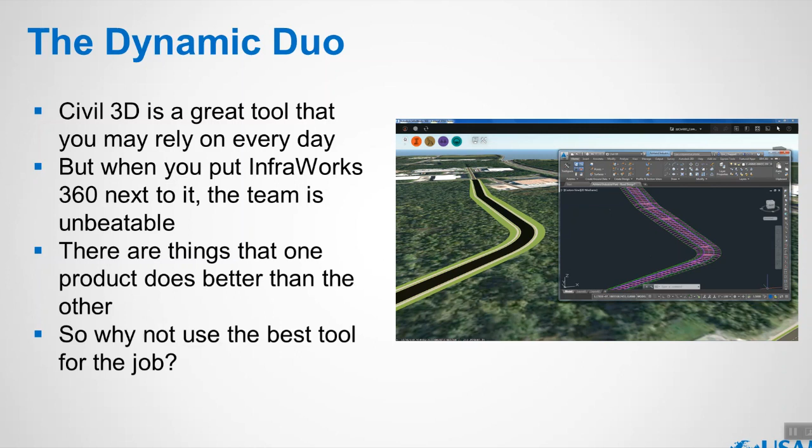Now, a question to people who are using Civil 3D over there: what and all can Civil 3D do? As it is not a live interactive session, I will just say my answer. So what and all can a Civil 3D do?

So in Civil 3D, we can input our survey data, which we found out, which we got from our surveyor, or which we took from the internet, or from our previous projects or something like that. We can make an input of it, we can do the road designs of it, and we can do the storm designs also. Then at last we can do detailed design and documentation of it. So these things and all are possible in Civil 3D.

So what are all the things? I'll repeat it. We can make use of the survey inputs and put them into Civil 3D, and the inputs will be grown as a surface over there. Then in the surface we can do a preliminary road design, we can do a stormwater design, and then at last we can do the documentation of it also.

Now let's see how these things work together with our newborn baby Infraworks. Let's take a look at how both the duo works good. Now we have a situation here. So I'm going to explain how these two tools are going to be a race winner here.

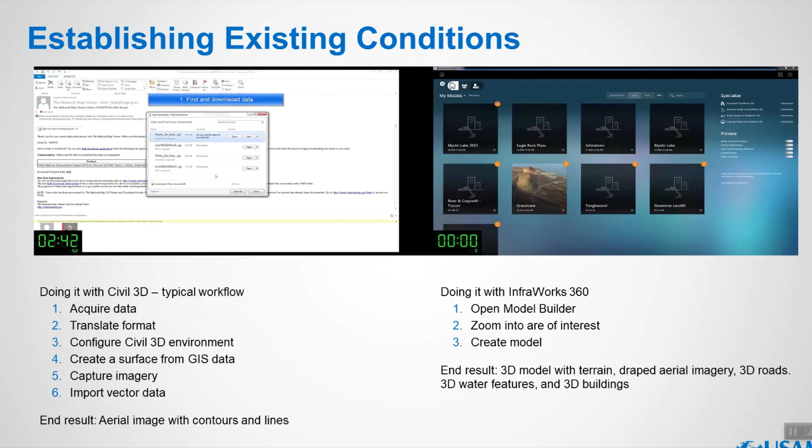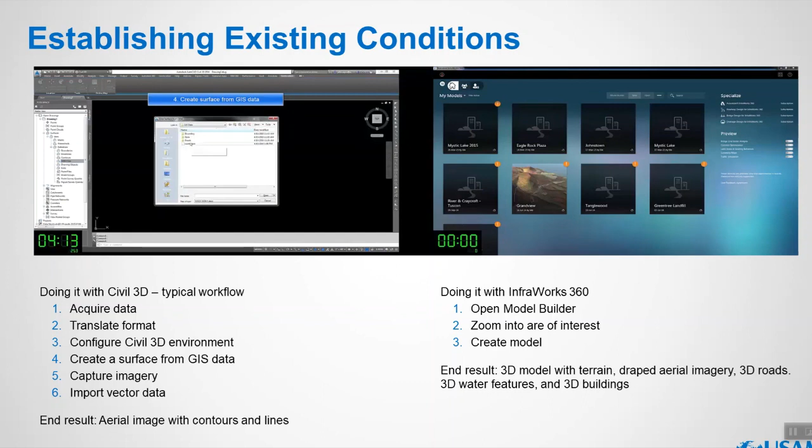Now we see them bringing survey data from an internet source and finding the place where they're going to make the project. They find the place and give the inputs to Civil 3D this way. Normally we don't rely on these steps - whether in tender stage or execution stage, we get inputs from our surveyor and feed it to Civil 3D. But here I've shown taking inputs from an internet source. Now the points have been brought into Civil 3D, and GIS data has been brought into Civil 3D.

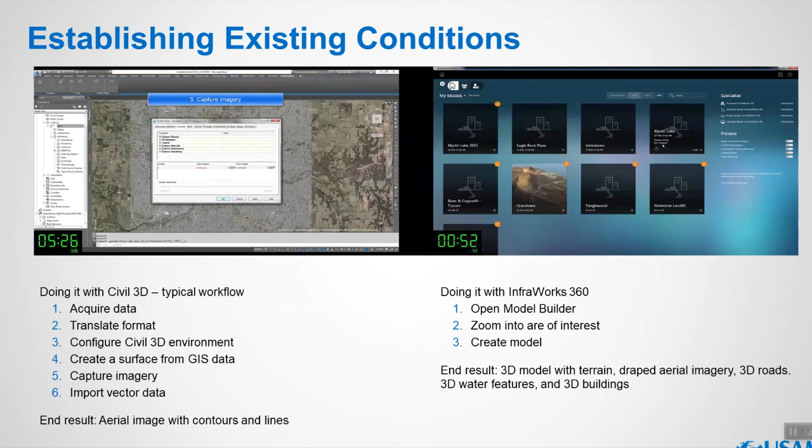Simultaneously on the right hand side, I'm opening my Infraworks, opening the model builder, and inputting the place name. Here comes my place name in the model builder. I'm just opening the project. Now the project will appear in Infraworks. You'll get the mail once the project is ready.

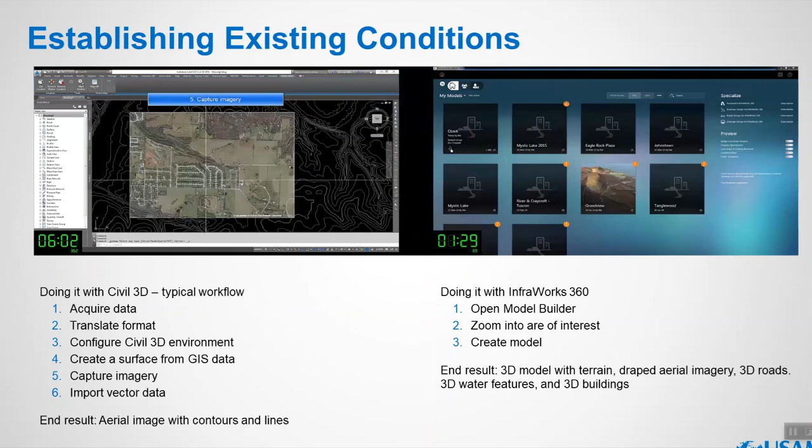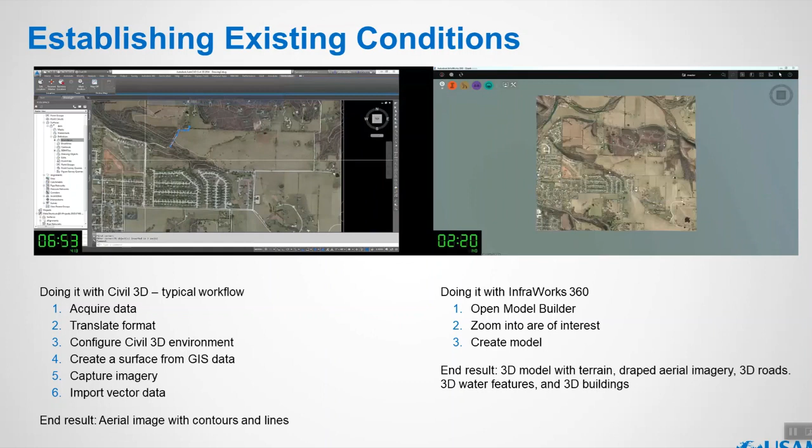On the left hand side our Civil 3D is running, we are making the map over there too. On the right hand side, the Infraworks video is running. Here we've got the model in just a few minutes - the same model we made relying on Civil 3D, we've got in Infraworks much quicker. The comparison is about 7 minutes in Civil 3D versus 3 minutes in Infraworks. You can see the real difference here.

What we did in Civil 3D: we brought the survey input, our GIS data, from some other internet source, made it an input in Civil 3D, cropped the area, and gave my latitude and longitude to crop the area. But in Civil 3D, what appears is just an aerial image, that's my map - an aerial image with only the contours of it. Note this point: aerial image alone, with only the contours.

But in Infraworks, within the quick time of 3 minutes, I just inputted my area name, that is my latitude and longitude, and the whole aerial image was there. I just cropped where my project comes, just cropped the place. So a full 3D perspective view of that area is in my Infraworks now.

Just 3 steps - here there are more steps in Civil 3D, but here just 3 steps. You should know this point: what is my end result here is a 3D model with terrain - we got our 3D model with the terrains, that is, ups and downs in the surfaces. Then 3D roads, whatever is available over there. If there is a building, it would be available in 3D. If there is a bridge or rail over there, all the things will be in 3D.

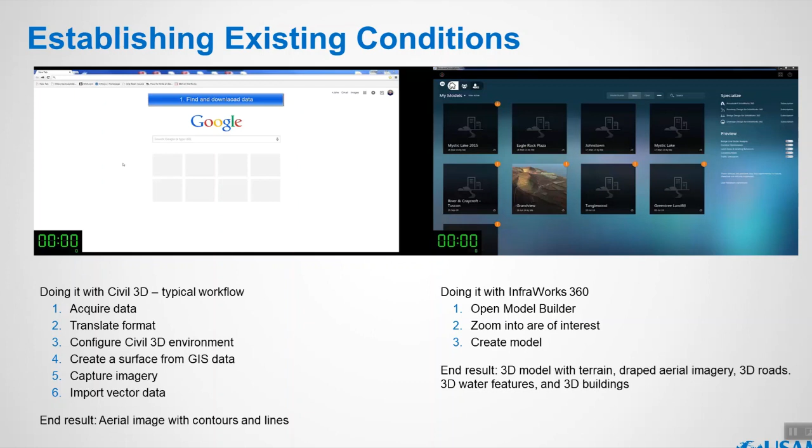But both put together, how you can work smartly, that is my point. Now what we saw, we are going to see the comparison - the ins and outs in it.

With Civil 3D alone, I have made it in 7 minutes. With Infraworks, I have made it in 2 minutes 20 seconds. Now what are all the pain points over there?

We are going to talk about the pain points. With Civil 3D alone, we don't have our survey inputs. So we spent much more time locating the data, and in deciding from what source we should take the data, we spent more time on it.

That's the first point. The second point is, basically to work on Civil 3D or any design tool, expertise level is a must, and experience to get this data. So where to get this data and where to pull out the things, experience is required over there.

Then there are many steps involved in this to bring it together. If I teach these things now to you in a span of 10 minutes, seriously, no one will be gathering and repeating the same thing in your system, because it contains more steps. You will be getting confused in it. So we should look over it and do the things carefully - the experience plays here.

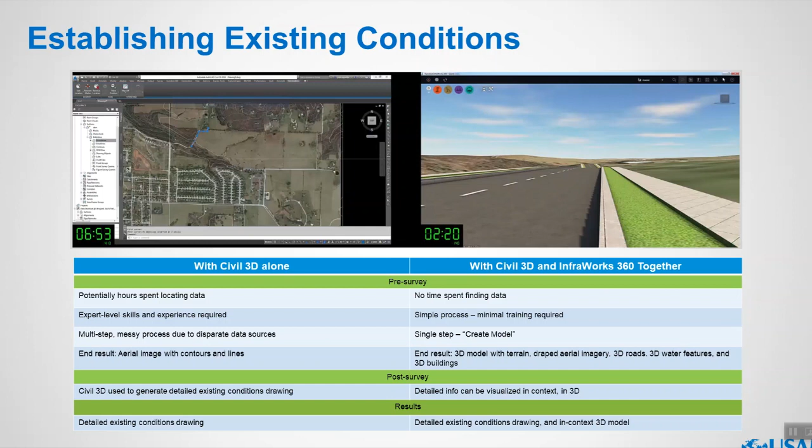So the next thing is, we saw about the survey part, right? As I said earlier, Civil3D does the survey work, the road work, and the rail work. Now we are here for preliminary road designs. As we all know, Civil3D is a design tool where you can do designs as per the codes. From 2019, they have brought IRC codes into it. Before that, they had AASHTO codes. But from 2019, we have IRC codes inbuilt, so we can make use of it and do the road designs in it.

Now we are going to see how road design works in Civil3D and how it works in Infraworks. The same concept which we saw before in the survey, now we are going to see in road design.

Now our situation is to develop a preliminary road. We have brought our survey records, right? So in that survey place, we are going to do the roads. So how much time it takes to complete in Civil3D and how much time it takes to complete in Infraworks.

The road should contain engineering based horizontal and vertical design, because every road should contain horizontal and vertical elements. That is, our super elevations will be there, then the alignment curves will be there, right? So that and all we will be doing according to our codes. Then the cut and fill of the roads, then at last, as I said earlier, how long it will take to complete the things.

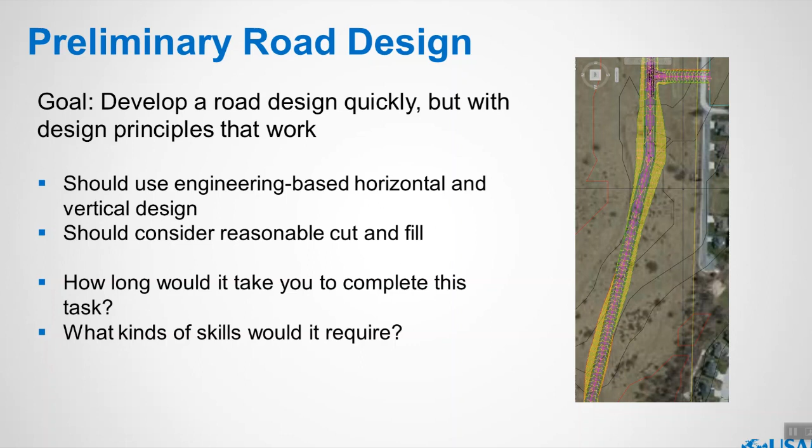Now we are going to see the comparison between these two. What I'm doing is I have recorded the things which we have done in Civil3D. You can see the left hand side video running. What we are doing is we are acquiring the place where the road comes, and we are just drawing the alignment in it. How the road comes, we are drawing the alignment and making the profile of it.

Every design engineer would have come across these terms in their projects, but other than that, many people are here, right? So alignments are nothing but our center line of the roads or center line of the rails. Then the profile is the section of that alignment which runs on the surface.

That is, our ground surface is there, and there we are running a line. How that line, based on the surface, in horizontal and vertical manner, how the line runs on the surface - that is termed as profile. That is vertical sections, so that is called profile.

So we have made our alignment in the project where the road runs. Then we have taken the profile for that alignment. We are seeing the profile for that alignment. Automatically the profile is nothing but how the alignment runs on the surface in a vertical manner - what ups and downs are there in the surface.

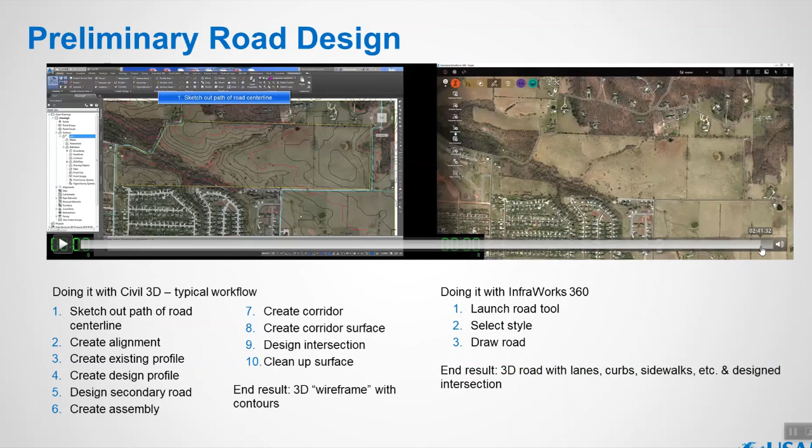We have made the roads. I have just drawn a line horizontally, and I have drawn a line vertically, and there comes my roads on it. I'll show you again. Can you see? So what we did, we just opened the project, we just drew a line, and in a matter of seconds my road has been drawn over there in InfraWorks.

But in Civil 3D, obviously Civil 3D is a design tool, so we'll be having all the design perspectives in Civil 3D, so it will take some time to create the roads in Civil 3D. But here in InfraWorks, in a matter of seconds we can complete the things.

But as we said earlier, InfraWorks is a pre-engineering tool. You should make a note of it. Only 75% accuracy will be there in InfraWorks.

Now I'll repeat the steps which we did in Civil 3D and InfraWorks. So what we did in Civil 3D: we have survey records, we have drawn an alignment over there, and we have made an existing profile, that is horizontal, that is vertical profile of it. Then the design profile of it, we have made the design profile. Then we have made the assemblies, how the road should be.

We have made the cross sections of the road, then run the corridors on it, and created intersections of it. The result is just a wireframe on the ground which we have created, and you can see it on your screen.

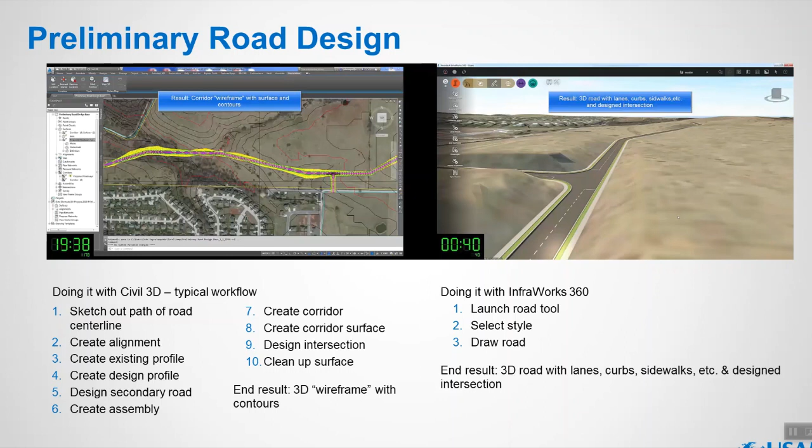So basically, we have done our road design in Civil 3D and we have made the roads in Infraworks also, right? At one point, after Infraworks, as I said earlier, you can do the preliminary things in Infraworks, and you can bring it directly to Civil 3D without any losses.

Civil 3D and Infraworks is a duo tool, so you will be having the Infraworks icon in your Civil 3D, and you will be having the Civil 3D icon in your Infraworks tool. So in both of the tools, the icons will be there. So it is a duo relationship tool.

So you can directly bring the things between these two softwares, and if you change anywhere in these two softwares, the changes will reflect. So in Infraworks, if you change, the changes will be reflected in Civil 3D. If you change in Civil 3D, the changes will be reflected in Infraworks. This is the duo relationship of these two softwares.

So once the preliminary design is completed in Infraworks, we'll be bringing the things to Civil 3D. Here, our hero Civil 3D will play a major role, because to do the documentation purposes and the detailed design purposes, we should rely on Civil 3D, because that is a design tool and an engineering tool to make the outputs pakka (final).

Infraworks is just a prelim tool which gives you the output in a matter of seconds or minutes. But for the design and documentation purposes, you should rely on Civil 3D only. So I have named Civil 3D as the hero here. So you should know the difference now. Civil 3D is the hero, Infraworks is the new baby. So if both of them combine, you can get the better output and best output in a short span of time.

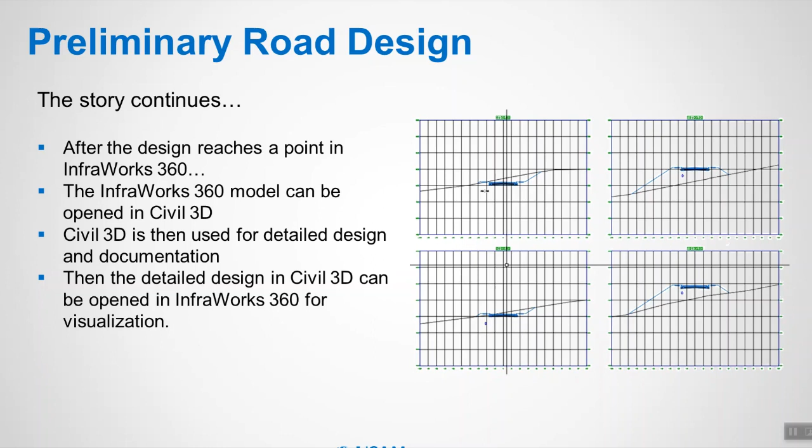Okay, so the same thing which we saw in the survey part, we are going to see the differences we have made in Infraworks and Civil 3D now.

So you can see, in Civil 3D it took 20 minutes to make a corridor with the intersection. Corridor is nothing but your roads. With an intersection, it took 20 minutes to do things with a high level of expertise. You should be an expert person in the design tools to make this 20 minutes happen, or otherwise it will prolong to an hour, 2 hours, or 3 hours. So high expertise should be there to make it possible in Civil 3D.

But here in Infraworks, it's just a 3-step process. Anyone can handle a new baby, but here this new baby, anyone can handle.

Now as we saw, there's a major difference here. In Civil 3D we have a 10-step process to do alignments, profiles, and so on. We have 10 steps to create that in Civil 3D, but here in Infraworks it's just 3 steps to make things happen.

Expertise level-wise, Civil 3D requires highly expert knowledge while only a basic minimum expertise is required in Infraworks. Civil 3D demands more detail than necessary for preliminary design. Even for a preliminary design, I'd need to give more details to Civil 3D to make it happen, but for preliminary design we don't need such accurate things. We just need an output for tender purposes, so we don't want to give more inputs and waste our time. That's why Autodesk recommends using Infraworks efficiently to get your prelim work done in a short span of time.

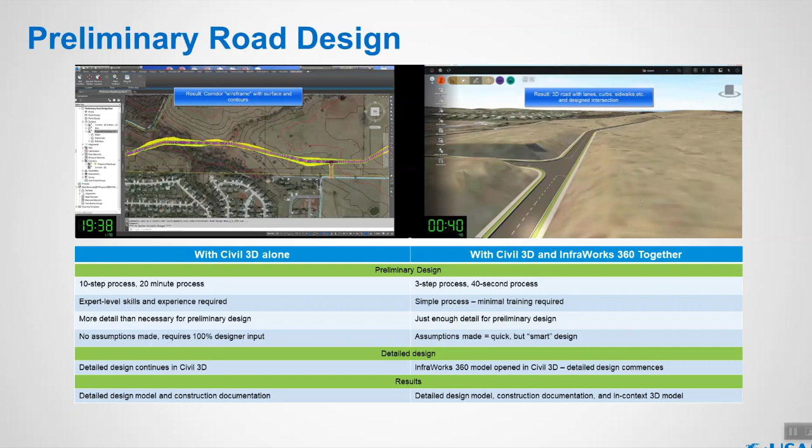Now we saw the basic preliminary road design right there. Now we are going to see how I'm talking about Infraworks being a great tool or Civil 3D being a great tool. It's not like that — you should keep in mind that both software have their own capabilities. As I said earlier, if you work together with these softwares, you can make your work best and complete it in a short span of time.

Now we can see how our hero Civil 3D does the detailed design part. We've just seen the basic prelim road design; here is the detailed design. Detailed design means labeling, section work, how to take the sections, how it will generate sections. Many people will have a doubt whether it will take a section or not.

The main thing we can do in Civil 3D, as I mentioned earlier, is storm design and sanitary designs — sorry, not design, it's modeling. We can do storm pipe modeling and sewer pipe modeling here in Civil 3D. In infra projects, pipes are a must, so we look at how the drainage system goes through the infra lines.

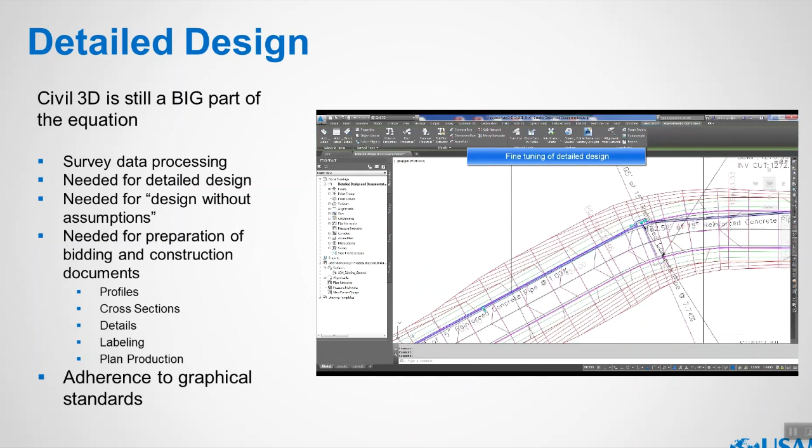So we are going to see a short video of how the detailed design works in Civil 3D. You can see the corridor which we made over there. They are just fine tuning the detailed design part, and you can see they are labeling the things here in Civil 3D. This is how Civil 3D is a hero here.

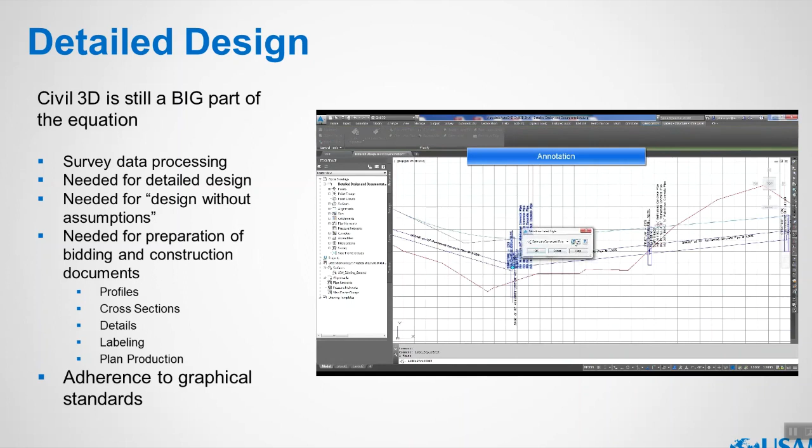Civil 3D can do all the things a design software can do. Labeling is an important part and documentation is an important part of the output — these two are the important parts. You can see how it works faster, how it connects to all the views, and how section views are generated automatically with just clicks.

We can alter all the things here in Civil 3D, just like in AutoCAD. Now we have brought the sections here and our documentation part is ready in Civil 3D. On the left hand side, you can see Civil 3D is still a big part of the equation — as I said, it is a hero. Survey data processing lets you process, filter, and prepare the survey data to make the surface from it.

We can do all the things needed for preparation of bidding in it. You can do the labeling parts, the documentation parts here in Civil 3D, according to the graphical standards and also the code standards.

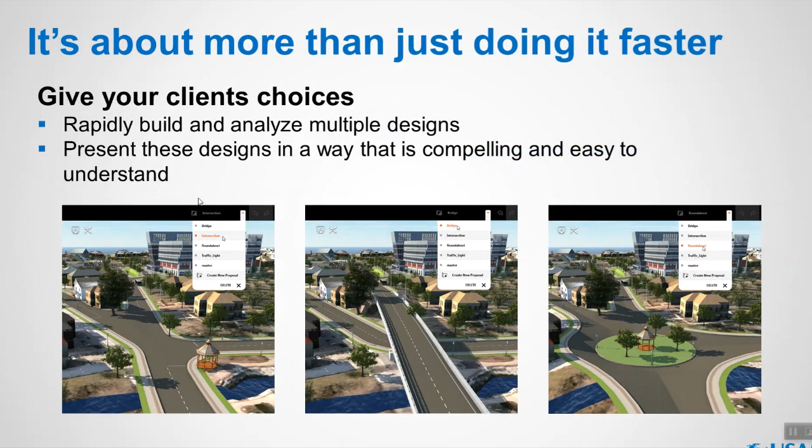I don't want to finish this webinar with just a theoretical view, so I'm going to show you how things work practically. We are going to open the Infraworks software. I should not just say things theoretically and wind it up like that, so I will show you practically how it works in Infraworks, how you can bring it to Civil 3D, and how the two combination works.

Now we have seen the things theoretically. You came to an idea that Civil 3D and Infraworks will play a great role in your projects, and will give you the best output in a short span of time. Now I'm going to show how it works practically. Now we can dive into the software.

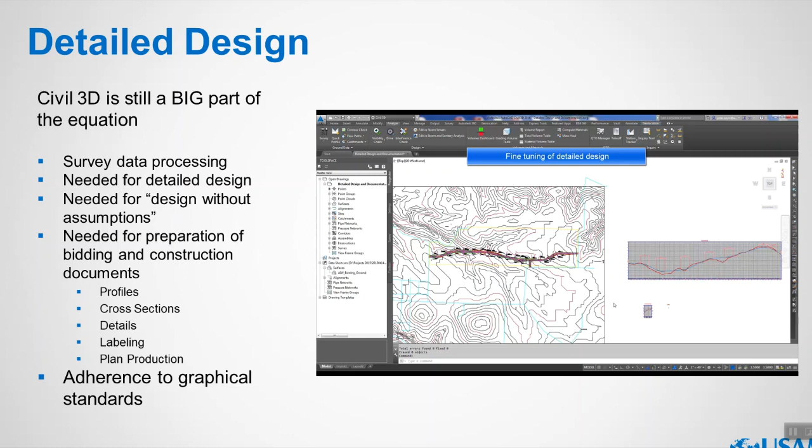Infraworks is a cloud tool. It's a cloud tool and it's also a desktop tool. So you should have internet facility to create a model.

This is your Infraworks interface. Here we'll be seeing the day-to-day projects which we are working on. Now what I'm going to do is rely on model builder. We just want to enter our model name, or the area name where we are going to do the project, your latitude, longitude, or just an area name, which will bring the whole area in 3D manner here in Infraworks.

Now I'm going to take a place in Chennai where, if you are an infra engineer, you should have come across the term called Kathipara Bridge, which is a massive structure here in Chennai. The bridge is about a roundabout, flying in all directions. So I'm going to take that location and show how things are there in Infraworks.

I'll type Guindy here, so we'll take this place, Guindy race course. Can you see the map? It's not Google Maps, it's Bing Maps, as I said earlier. It's a Microsoft product. So this is our Kathipara Bridge. Can you see how massive it is, how many rounds and roundabouts? This is one of the famous places in Chennai, Guindy. All Chennaites must know about this place, where the great Anna University of Tamil Nadu is located here in Guindy.

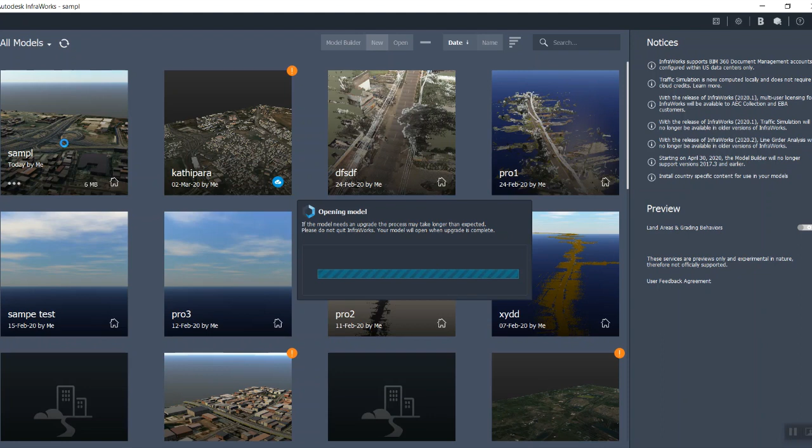Now I have a ready-made model, the same place, Guindy. I have the sample file here. So once the model is ready, we'll get an email and can come to Infraworks and open our model ready-made. Before opening, it will ask whether to save the model locally or in BIM 360. If you have BIM 360 cloud access, you can save the model in your BIM 360 project, or if you don't have it, you can save it in your local system. Now can you see a 3D perspective view of Guindy here in our Infraworks page.

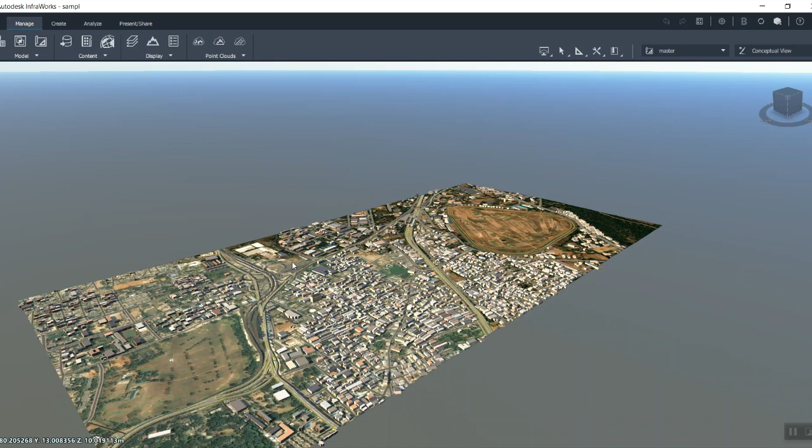So I'm going to zoom in and show you a magic, how it looks. If you have ever visited Kathipara, you will not be surprised. If you didn't visit Kathipara, it's a free visit to Kathipara. You should pay me now. I'm taking you to Kathipara now.

Yes, here is our Kathipara. Can you see our very own Kathipara bridges here in Guindy? As I said earlier, all the things are in 3D manner, but it looks like a cartoon. We can develop the things, right? So we engineers can develop the things how it looks.

So it's just a base of that area. Here one metro line is going, here one normal railway line is going on this side, here metro rail is going. This is our bridge, this side is airport, this side is Koyambedu. You can see all the perspective of where and all the buildings coming, what and all the things laid here, what and all laid there. So you can see all the perspectives here in InfraWorks.

This is just a sample I'm showing. You can check in your own software, you can download it and check the things over there, how it works. Now, in a fast manner, I'll show you how the thing works here.

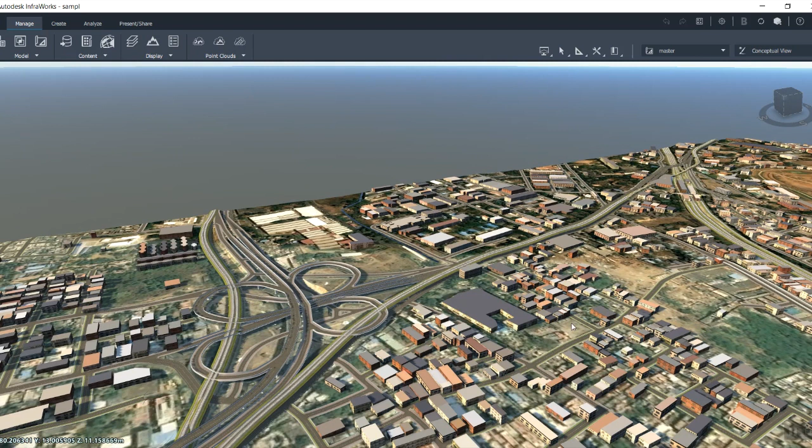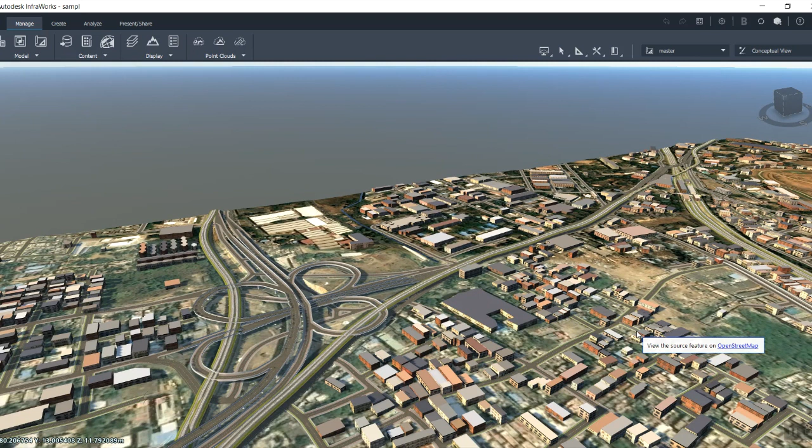See, now we have brought the Guindy over here. I didn't do a research of how the Guindy surface looks or something like that, I didn't do a research. Now what I will do is just lay a road. I'll take this portion, so here we will lay a road.

So what I'm going to do is go to the Create tab, where we have the road tab. Can you see planning road and component road? Component road is nothing but a 3D road, which is just for visualization purpose. But planning road is an engineering road where you can have cut and fills of the road and all the quantities of the road. So I'm going to choose this planning road here.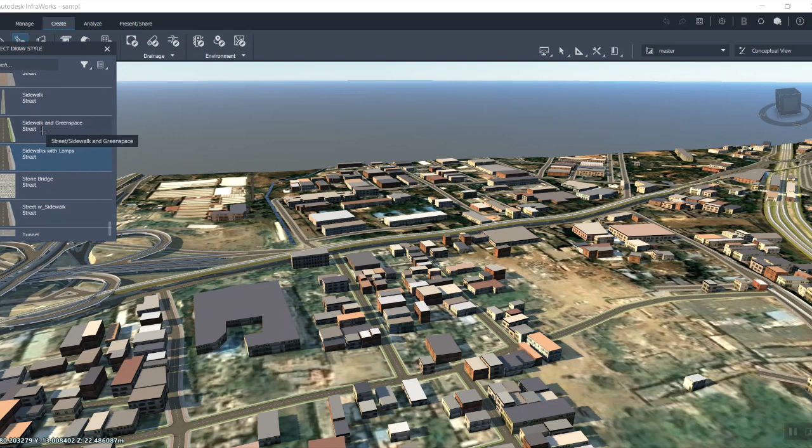Here you can see different libraries of planning roads. You need a 3-lane road—sorry, there is no 3-lane road—you need a 2-lane road, or a 4-lane road, or 6-lane road. How the road should be, you can see all the things here. We can select our very own library which we need for my project. So what I will do is select this sidewalk and green space, click here, and finish it.

In just 2 steps, I have made my road here. Now, as we saw in that video, it's possible to make intersections without giving any inputs. So now what I'm going to do is just click here and finish it here. See the magic now?

Can you see here? The intersections have been made. I didn't give any inputs here, and the intersections have been made. So you can do all these things in InfraWorks.

We can convert this road in a single step. What I can do is convert this road to a component road. And now I can just click this road, add structure, and make this road into a bridge. See, I'm just starting it here.

We will get a small bridge, okay? So we have a short span of time, I'll show you how it works and all.

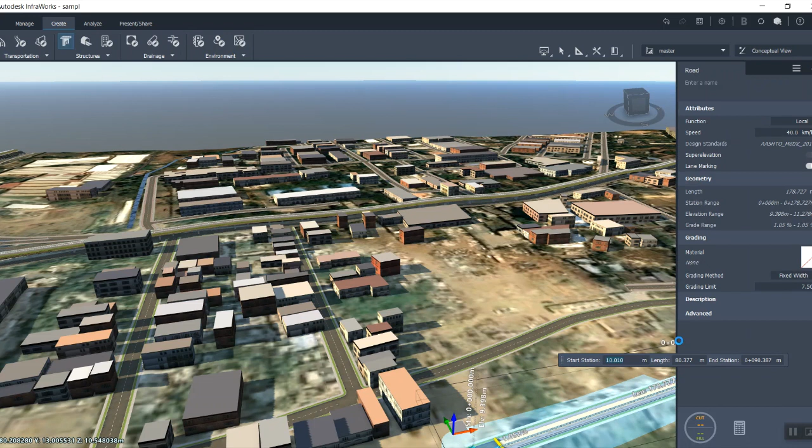We'll have an in-depth session on Infraworks. Many of them would love to learn this tool, right? It's an easy tool. You would love to learn this tool.

Can you see? I'll give escape first. Hope the bridge has come.

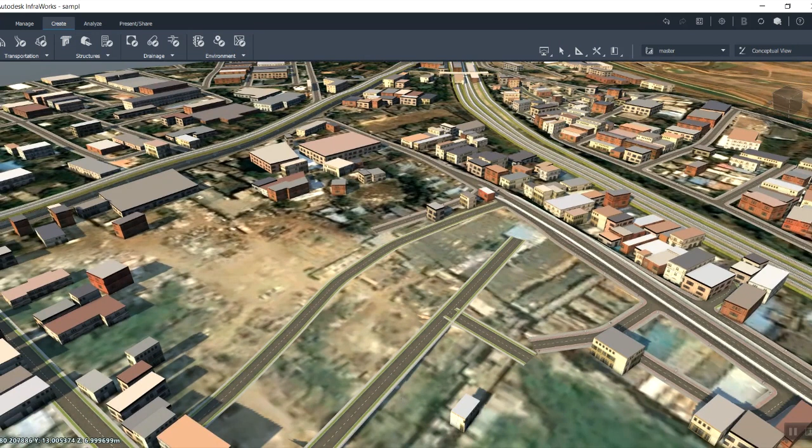Without a mouse, it's quite difficult to handle things here in Infraworks.

I'll show you underground, see, can you see? A bridge has been made, ready-made, within a few seconds, right? So this is just a sample. I want to show you how it works by just clicking things.

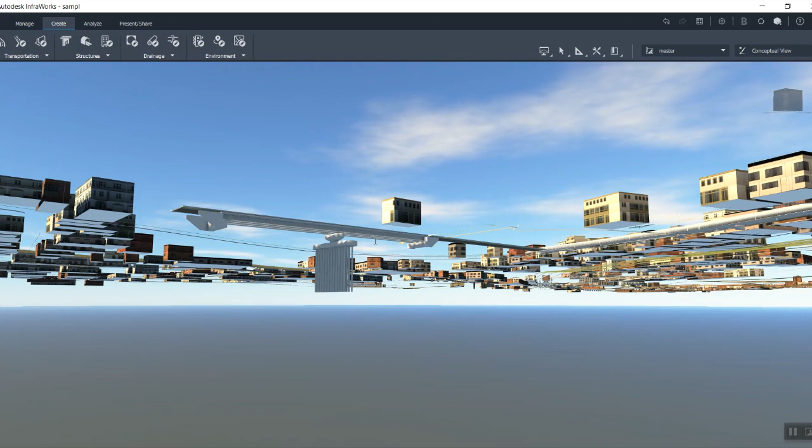Before that, I want to show you another thing. As I said earlier, this newborn baby is becoming a man or becoming a woman day by day. See, you can see a cut and fill report here.

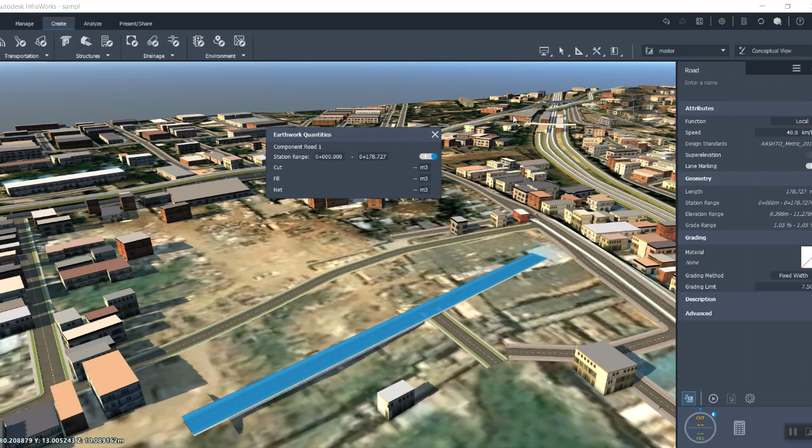So if I start this, can you see this magic? You can bet me, or tell me about any other software if it comes close, I'll give you anything you ask. It's a great tool that doesn't give accurate results, but gives approximate results of the cut and fill quantities also.

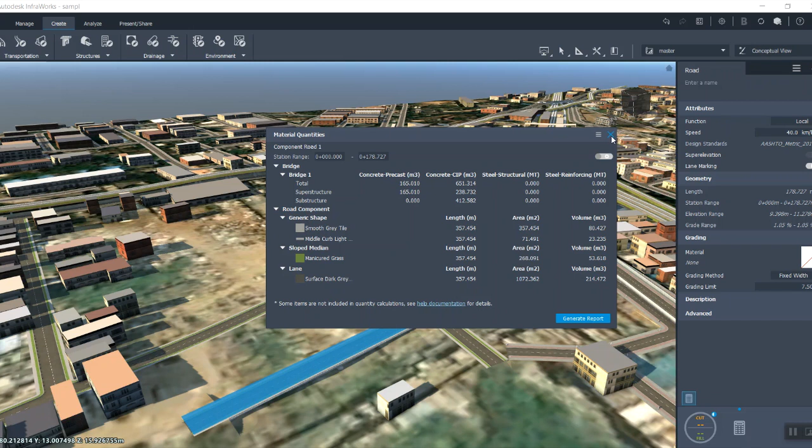They are building it as an engineering tool. In the future, it will be a powerful and competitive engineering tool. Infraworks will be a leading engineering tool in the future. So now they are building it step by step into an engineering tool.

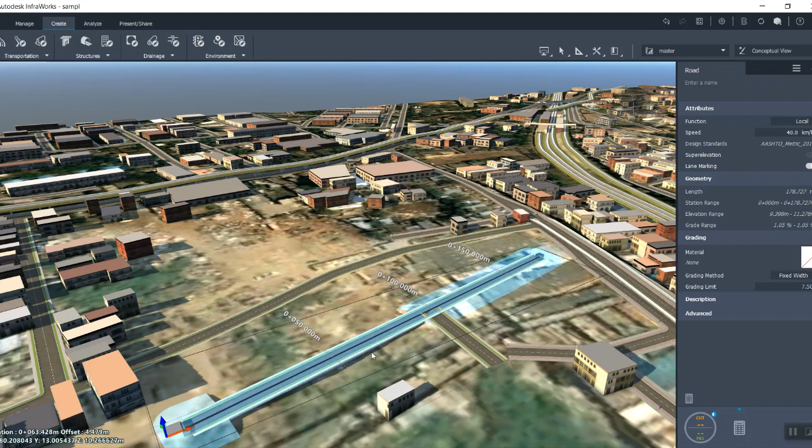You can see the cut and fill quantities. We can have the cut and fill quantities, and I can also have my profiles here showing how it runs in the surface. I can do all these things before that. So this is just a short brief about Infraworks, how it works.

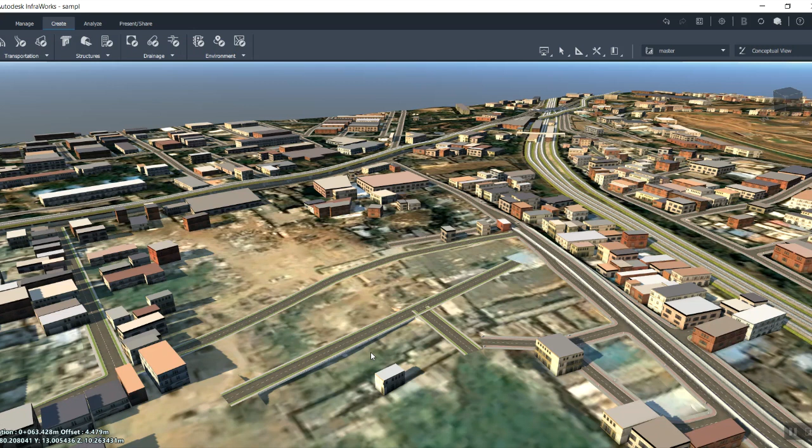We will have a separate session for Infraworks, and I'll show you how the beauty of Infraworks works. Now what I will do is export this part alone to my Civil3D, and we will see how it works over there.

Let's do it quickly. I'll go to the Present tab, then the Share tab, and export as IMX, which works on Civil3D ready-made. So IMX is an Infraworks format, .imx.

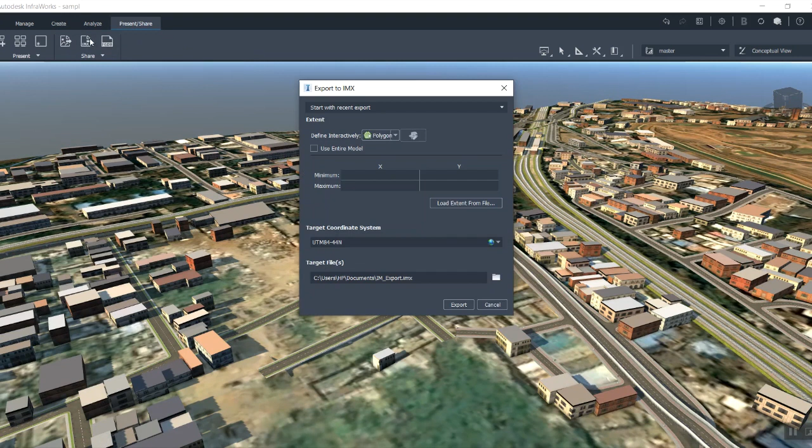So what I will do is make a polygon. I don't want my full project to be viewed in Civil3D, so I'll scale it up from this to this. Yes, up to this should be viewed in Civil3D.

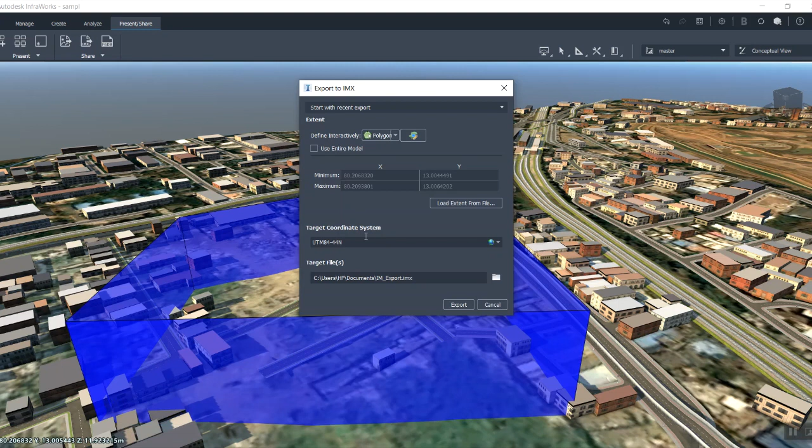The coordinate system, it will take automatically. Where should the file be saved? I'll save it to my desktop as IM_Export.imx, you can note the name. I'm just giving save and export.

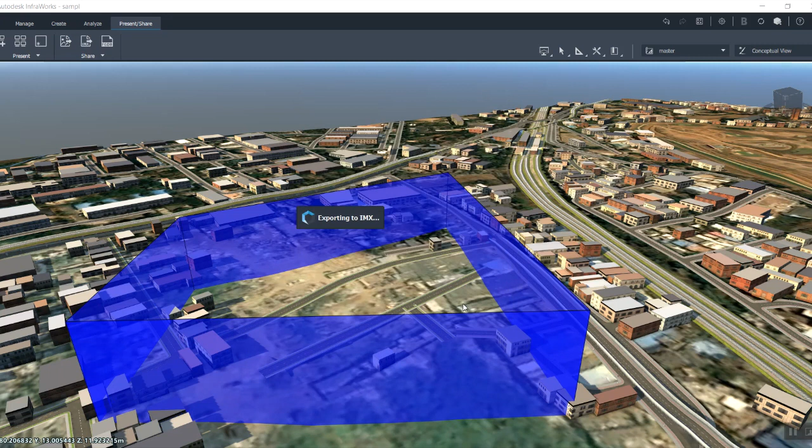So our IMX format is getting exported. It will take a little time before it's exported. We will open our... yes, it's got exported.

Now we will open our Civil3D tool. Yes, it's getting open, Civil3D 2020. Hopefully within a few days 2021 will get released. Yes, we are hoping for new features in it.

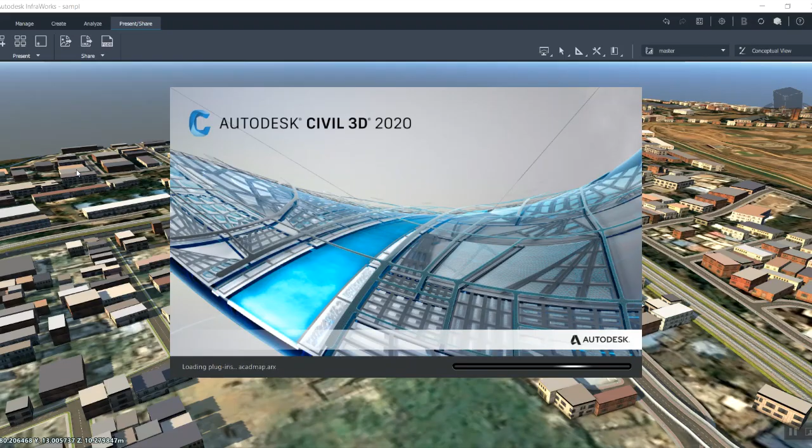Now what we will do is import this IMX which we have exported from Infraworks. We will import this IMX here in Civil3D, and we can see how it works here, how it gives the input here, good.

This is our Civil3D. It's an unusual message which pops up. Yes, my Civil3D is getting open. This is my first attempt to open Civil3D today, so it's taking quite long.

Okay, we have got our new file here. So what I will do is go to the Infraworks panel. We are having an Infraworks tab here, and can you see the import IMX tab? I told you, right, it's a duo relationship here, so you can directly launch Infraworks from Civil3D. Now the duo works beautifully here.

I'm going to import my IMX format. Where is it, it's on desktop, right? Yes, im_export.imx. I'm just opening it.

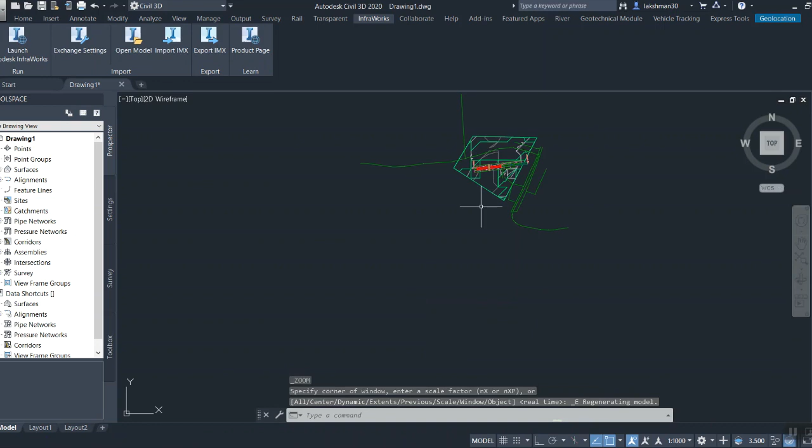Yes, here is our file. I'm going to zoom all. We have got our tool. Yes, can you see the corridor which we made there? The planning road which we made in Infraworks reflects here. This is our surface - you can see all the native properties of the surface.

If you are a Civil3D user, you would be used to it. See, can you see the surface here? Surface properties here, I will show you the profile. If you are not believing it, you can see the alignments over here.

So these are all the names, these are all the streets over there in the particular place - Maduvankarai Bridge, MKN Road, Vembuli Amman Koil Street, Venu Reddy Street. These are all the roads over there which have been inputted in our Infraworks.

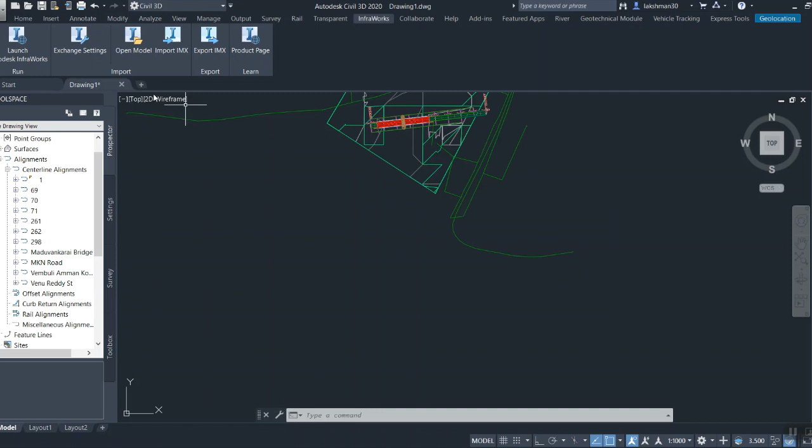Which came all along with Infraworks to Civil3D. Now, if you want to see the magic, is this a surface or not? You want to believe? See, I will select it and go to Object Viewer. You can see the ups and downs in the surface.

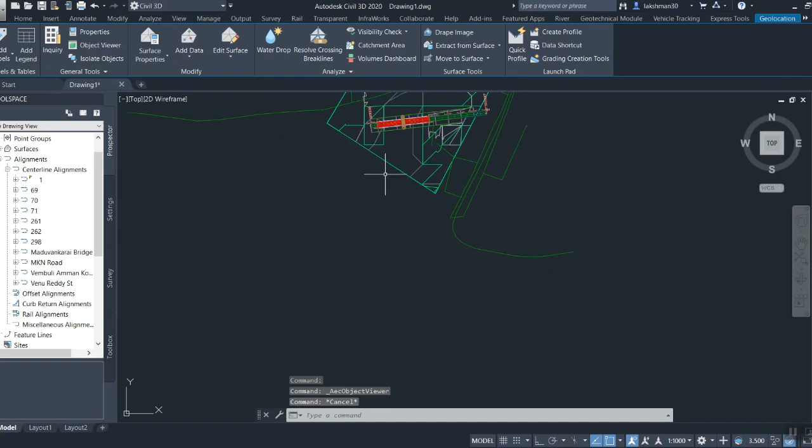I'll give it a conceptual view. See, can you see? There are some ups and downs. So this is a real surface which has been brought from Infraworks. So it works nicely. So I will create an alignment pat-a-fat and finish the things.

I'll show you the profile there, because you want to believe, right? So whether it is a surface or it's just lines over there. So what we will do, we will draw an alignment here. Yes, I'll give escape. Now we have an alignment here.

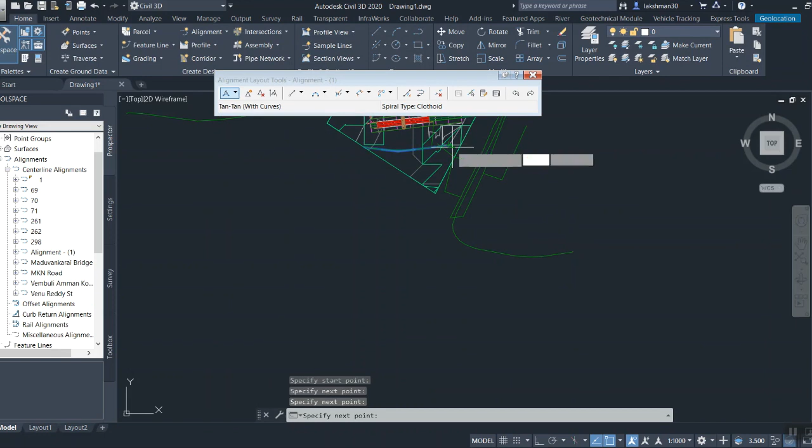I will make a profile of that alignment - create surface profile. So my alignment is Alignment 1. So I'm going to give it for existing ground. Draw and profile view, create profile view.

Can you see? So there are ups and downs in the surface. So this is not just a line, this is a 3D surface which gives you an approximate result from that land area.

We didn't do any surveys. We didn't get inputs from any other third-party tools. We just went to our Infraworks, we just inputted the name, we just exported it, got into Civil3D, and we have our things right now here. Within a few minutes, we have made this output.

So you can make use of these two tools together, and you can bring the outputs beautifully, and make it into a presentable view for your clients. We can achieve things in a short span of time. This is what we need, right? So we want to complete projects quickly, and we'll be getting rewards from our clients and from our higher-ups also.